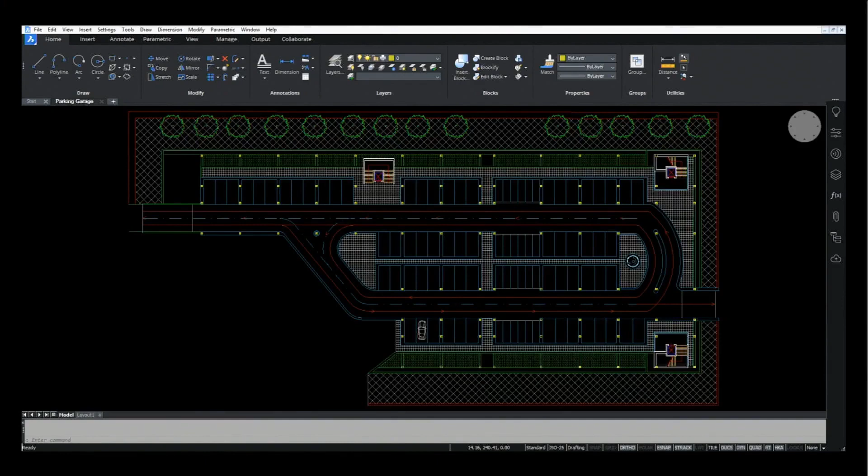It's dark, isn't it? Yep, dark UI - far and away the number one request. I am a fan, I was one of the guys asking for that. Yeah, what we heard is, wow, that's really white, or can you turn down the brightness? Your request is our command.

So you'll be seeing this demonstrated. As Heidi and Hans jump in, you'll actually be seeing it in action.

Other things we heard was that from an interface and workspace point of view, people wanted a familiar, easy to implement, easy to learn, and easy to acclimate to user environment. We're aware that a lot of people coming to BricsCAD are coming from other programs, so we want to make that transition simple. Heidi was a huge advocate for getting the new workspace environment set up with different ribbon arrangements, which she'll show you as she toggles through her demo. So we really listened, and implemented a new quick access toolbar, a new startup launcher, and a much more discoverable and easy to control quad cursor, so new users can be just as at home with it immediately as experienced users who already understand the quad.

But enough of me, let's get over to the action. Over here is Heidi Hewitt and Hans de Backer, and they're going to be your cruise directors today for looking at our demo features. And I'm going to go ahead and hand it over to Heidi.

Great, thanks Robert. We're really excited to share our new user interface with you. I'm going to go ahead and start by actually launching BricsCAD V20. You can see we've got our different product licenses there, so depending on what license level you have, you'll see what access is available. And you can easily update or upgrade if you want to access a license that you don't currently have.

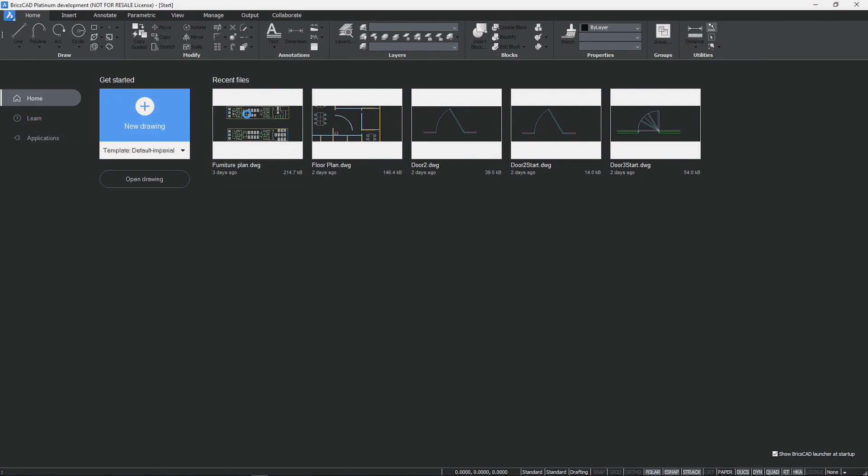Starting off, I'll go into the drafting workspace. What you can see here is we've got a new Start tab with your most recently used files. You can create new drawings, open existing drawings. We also have a Learn and Applications tab for learning content and third-party developer applications. I'll open up a drawing and take a look through the interface.

As Robert mentioned, we've got the quick access toolbar up here, and this has the most frequently used tools that you will use regardless of which workspace you're working in. So a lot of commonly used tools up there.

Below that, you'll see the ribbon. This is the default drafting ribbon, but we really have a default workspace for any of the environments you work in. We want to make it easy. One thing we learned from customers is that most of you are working in 2D right now, but you want to go to 3D and to BIM. So we made it as easy as possible to move from 2D to 3D to BIM or mechanical. What you see here is the drafting workspace with all those 2D tools that you have in a core BricsCAD classic license.

But very easily, if you switch over to a modeling workspace, you'll see a very similar UI with access to those 3D modeling tools, in addition to the drafting tools you still need to create 3D profiles and that kind of content. You'll notice we have some new tabs on this workspace, the BIM and mechanical tabs. If you don't have a BIM, mechanical, or ultimate license, you won't be able to use these tools, but you can see what's available, and if you choose to upgrade, you can migrate pretty easily from the existing tools in a modeling workspace up to BIM or mechanical by seeing the tools available in addition to what you've been working with in 3D.

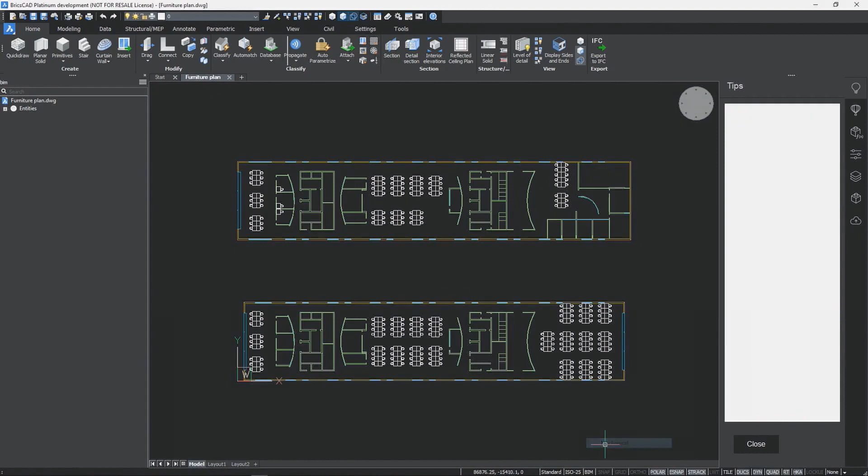We know that a lot of people also like to use toolbars, and everything I'm showing you is completely customizable. For those that like toolbars, we still have the drafting and modeling toolbar workspaces available. So everything is available by default, how most of our users want to work, but again, all customizable.

Before I go to the quad, I want to point out the panels. These are great improvements across workspaces in V20 - stackable panels that you can display. Previously we had the ability to stack panels and display them by tabs, but if you stack a lot of panels like your attachments, layers, and properties panels, you can have quite a few tabs and can't necessarily read them all. So we gave you the ability to stack them and display them as icons. By doing that, you can roll them up out of the way, easily access all of them, and really maximize your screen space.

It goes much further than that. For those who really want to maximize screen space, you can use clean screen, turn off all your tools, and we have the wonderful quad available right at your cursor. This is really a heads-up design access to your tools. They're context sensitive, so depending on the type of entity you pass over or where you are in your design or command, it gives you tools specifically for that context. Some users like the quad but want to turn it off easily when they don't need it, so we've added this X, a huge request we've had from users. You can close that out and always turn it back on from the status bar.

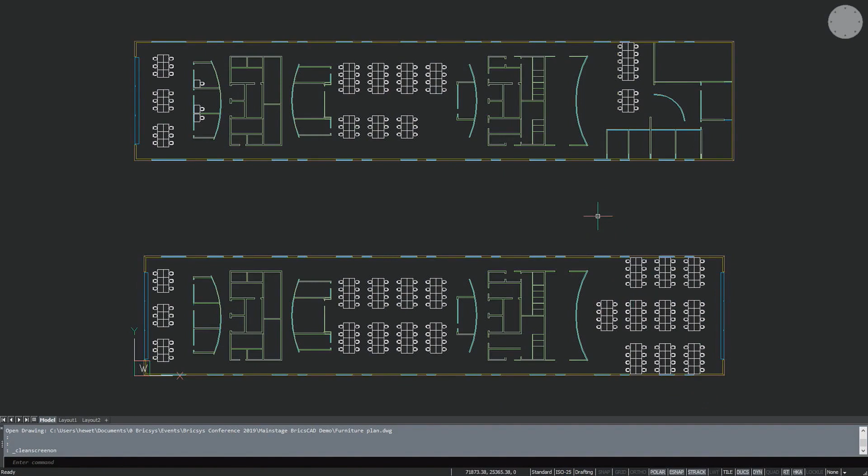So a lot of big and little enhancements that we've made, again, in response to the user feedback we got. All right, I'll hand it back over to Robert.

What do you guys think? Looks good?

Another thing we heard quite a lot, and Heidi and I were kind of surprised, is that civil engineering is a lot more important to most of our customers than we might have thought. What we heard was that whether we're moving dirt around on the surface of a construction site, moving mud around underwater in a canal, or trenching something out in the North Sea, moving dirt, computing basic volumes, and having basic surface alignment capabilities and grading is something that was important to many customers.

So some basic civil engineering features have been grafted into V20. Now, is this a civil design suite? Will this allow you to design subdivisions or do analysis? No, but it does up the bar on the basic features that you will have available to you in a BricsCAD license without any kind of verticals, without any expensive kind of add-ons.

Now, if you want to go the distance, you need to come to the presentation that the guys from Civil Site Design are giving, because they'll show you a lot more about their solution. But at this point, I'll shut up and let Heidi show you what we've got up our sleeves for civil features. Great.

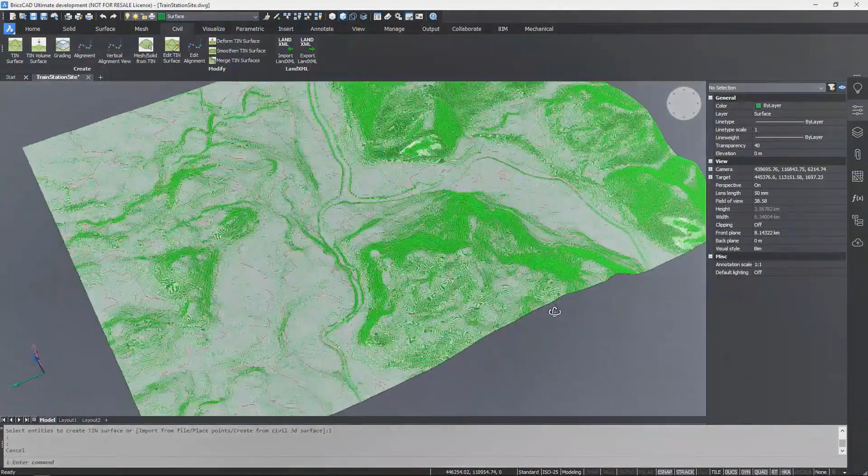So what you can do with the civil tools is you can actually create TIN surfaces. You can create those from a data file where you have all the points stored. It automatically creates the TIN surface, and you can use that for your model. There are various properties when you select that TIN surface that you can use, for example, to turn on contour lines. And then there are other tools for editing the TIN surface.

In this example, what we want to do is just crop the surface so that we add a boundary, so we see specifically the area we're most interested in working on for our design. Now here we're going to focus on creating a little pond in this area. So using the smoothen tool, we can very subtly smoothen out the area of our terrain to create that pond.

And then we can use the deform tool, and as we specify the profile that we want and an offset for it, you can see as I pass the cursor over that it actually gives a preview of where it's going to go, so you can place it in the best spot, and then simply drag up or down to deform that surface.

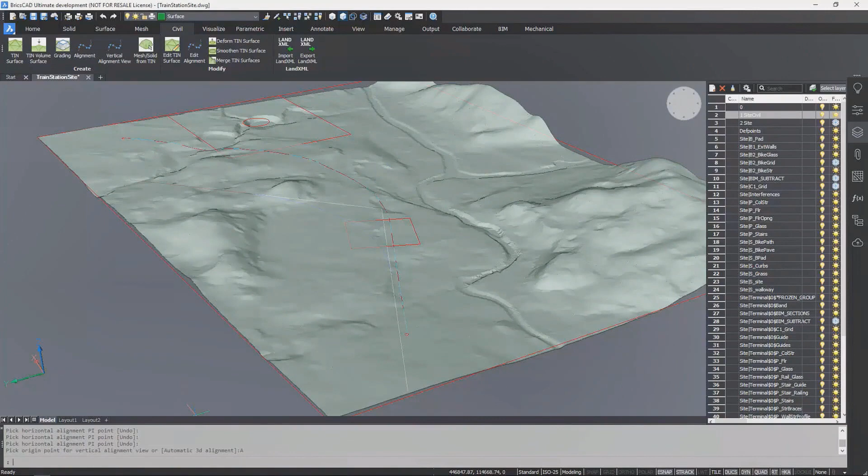There are other tools, such as the alignment tool, and in this example what we're going to do is create a rail corridor for the train station that our architectural team is designing. To do that, we can simply pick some key points for our alignment that we're creating, and by snapping to those points on our design, picking the start point, passing through our train station area and the end point, it automatically creates alignments, horizontal, vertical, and we can have it create 3D alignments automatically.

Now these alignments are all linked together. So as you edit one alignment, like the 3D alignment, the others automatically update. And you can control various properties so that you can see and adjust the design alignment for how close it matches the terrain alignment, the actual surface alignment.

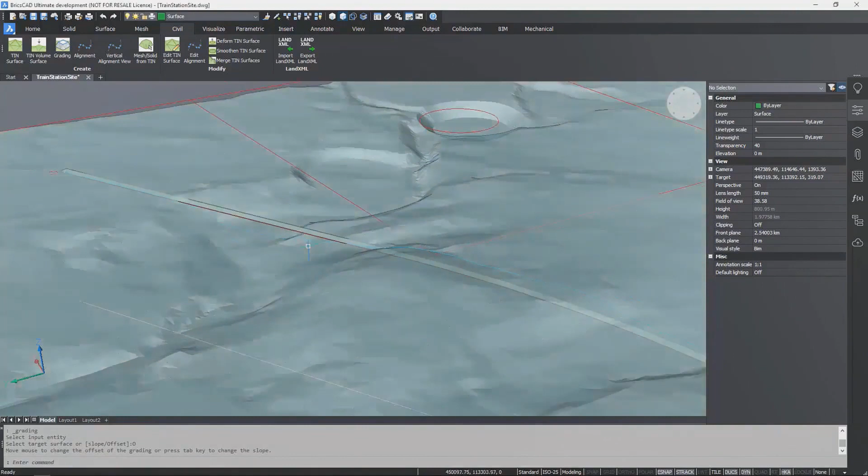Now, in this case, if we're designing a rail corridor, we probably don't want to follow the terrain too closely. We want our train ride to be smooth. So what we can do is modify or create gradings so that our surfaces will actually be appropriate for our design. Here we're creating a grading that we offset the alignment to each side, and even as we create the gradings, we can still continue to edit our design. We can change the shape of the alignment, and the gradings follow because they're all associated.

We'll continue with the design, creating additional gradings. We could create a grading that goes straight down from the alignment to the terrain, but instead we're going to create a grading that goes from our flat surface for the rail corridor and give it a slope down to the terrain, and we'll do that on both sides. Once we have the gradings created, we can merge those gradings together.

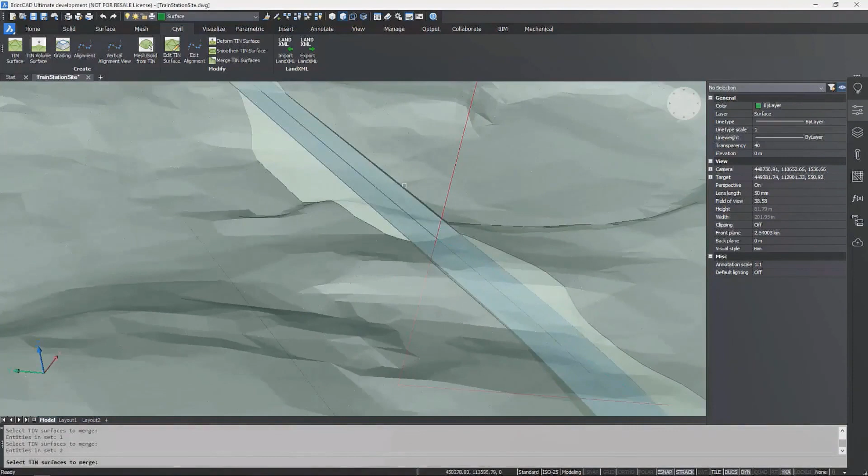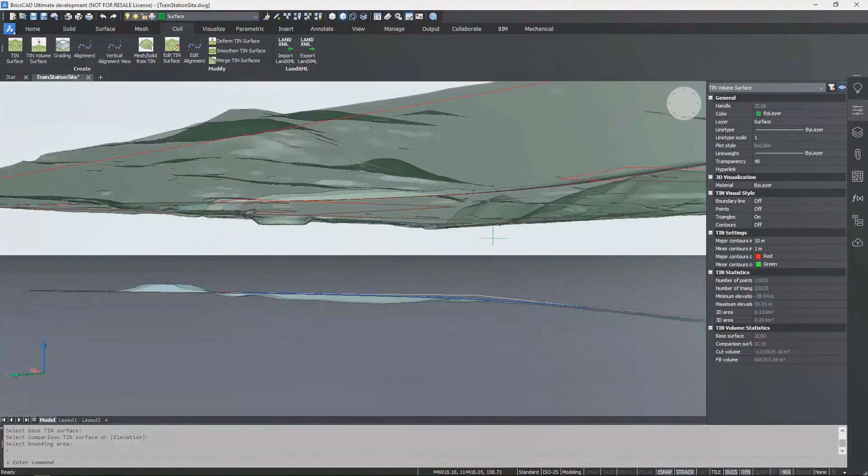So we have 4 different gradings all associated with the alignment. We merge them together, and then we can create a TIN volume surface between our design, those gradings, and the terrain. With that TIN volume surface, we can select it and look at its properties, including cut and fill volumes. So a lot of power here, and this was just one example with the rail corridor, but you can imagine using this as the platform for our building, our train station building, or many other projects—dams, and just about anything else in a civil type environment. These are tools included with BricsCAD V20 with a Platinum license.

Love it when the software works, right?

Another thing we heard when we talked to customers is that Heidi would always show Blockify and Parameterize, which are 2 of our AI machine learning generation tools, and these were always very popular demos. The feedback we usually got was, wow, that's cool, nobody else is doing that—that was the number one thing that was nice to hear. Then right after that, what we heard was, what else? So what other cool things can you do? That sounded like a challenge to us.

Challenge accepted, right? So Heidi is going to show you some Blockify improvements and a new feature called Copy Guided. We're also going to take a look at some futures—things we're working on that aren't all the way baked yet, but will be pretty soon, so we want you to take a look at that. Heidi has a couple of demos she's going to show you, and I'll go ahead and get out of the way and let Heidi show you around.

Great, thanks Robert. I do want to emphasize that as we were meeting with customers, many of them still work in 2D. We love the 3D functionality, it's really cool, but we don't want to forget about 2D, and we want to make our users as comfortable and productive as possible. So from our user feedback, this is some of the things we're able to offer with V20.

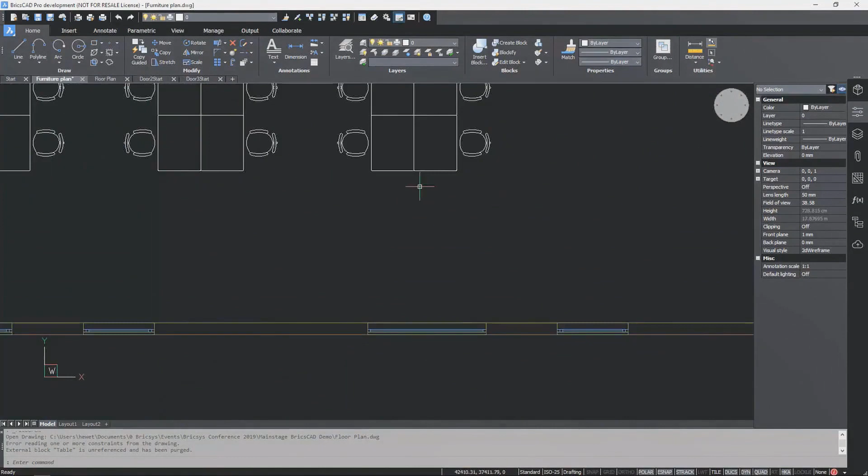In this case I have a floor plan with some geometry representing desks and chairs. If we look closely, these are individual entities, not blocks right now. Looking at the properties, the desk and chair are composed of 9 or 18 different entities. If I select similar for all of those, it's over 4,000 individual entities. So the drawing's a mess, and that's not good drawing practice.

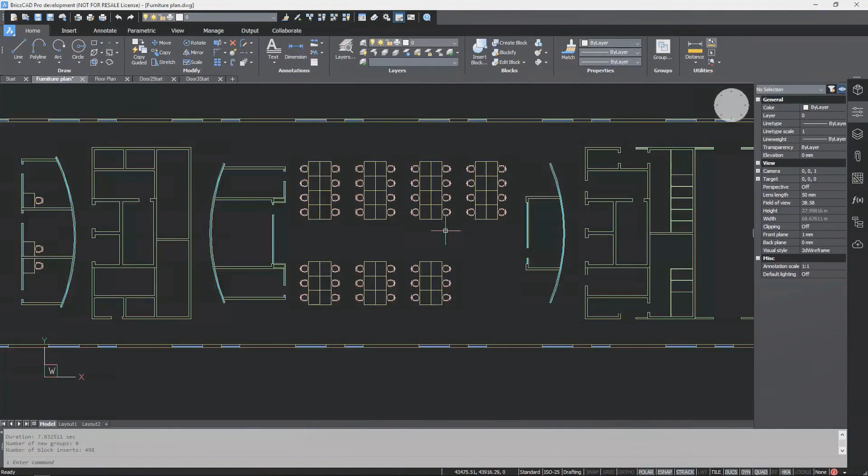What I'm going to do is just use Blockify and take all the defaults—very simple, I don't have to think too hard. Taking the defaults with V20, BricsCAD looks through the drawing database, the block database, and if it finds a block definition that matches that geometry, it automatically replaces all that geometry with those existing block definitions and instances. Really powerful functionality there. But it goes even further—now we've got these two individual blocks, the desk and the chair, created automatically.

What we can do is use the Blockify tool again—there's a setting that lets us detect patterns for arrays. If we enable that setting and select just 2 of the desks and 2 of the chairs, then take all the defaults, BricsCAD automatically goes through and looks for patterns that match those 2, and generates arrays from there. Very quickly it's able to find those patterns. If I select that, it doesn't look any different, but now when I select it I can see it's actually an array with the properties of an array, as if I had created it manually, but it did it much quicker.

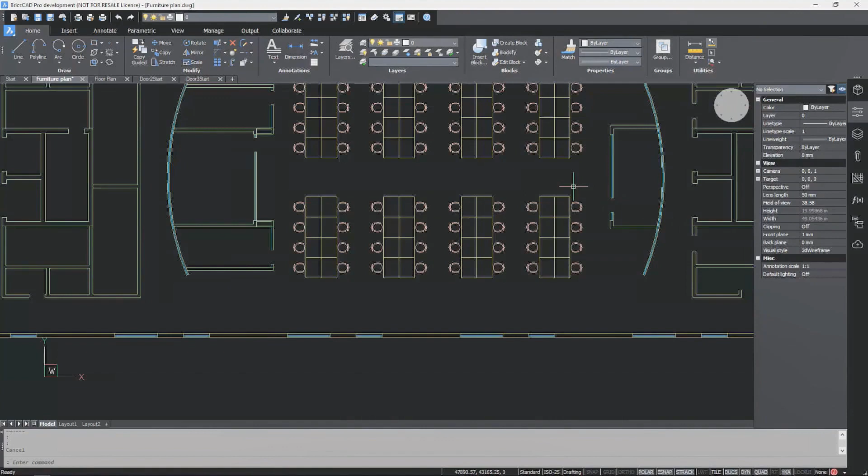So I can change the values, maybe increase the number of rows and columns, saving me a ton of time. If I had to clean this up all myself, it would be quite time consuming. So those are some enhancements to Blockify, which was my favorite V19 2D tool.

Now, in V20, one of my favorites is going to be Copy Guided. By the name, you can tell it's probably something to do with copying entities. What I'm going to do is select this chair, and I want to copy it to other locations. Anything that falls within my selection window is copied, but anything the selection window crosses is used as guidelines. So you can see, by simply moving that chair around, it's automatically snapping to similar entities, and it even snaps to the arc entities.

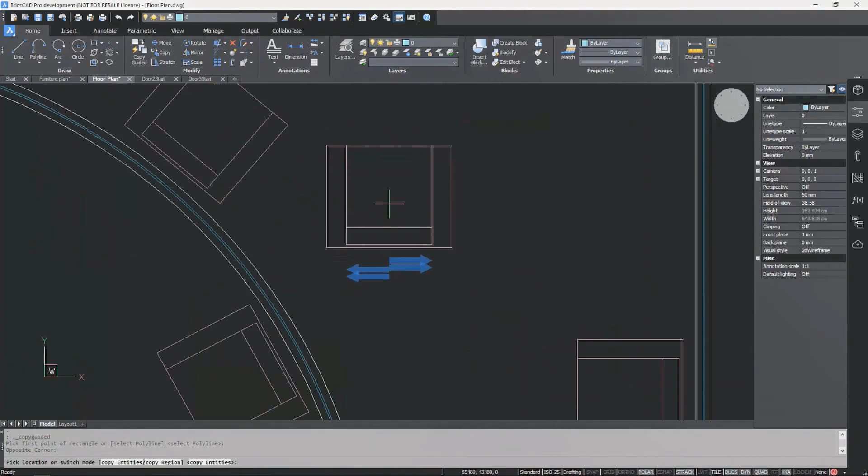In this case, when I created that selection, I crossed over the wall, which included 4 lines. Let me point out, these are just lines, not BIM entities, not walls. This could be a mechanical drawing as well. But it had 4 vectors, 4 lines that it passed over, so when I try to pass it over other entities, it won't snap unless they match those same lines.

But I have more flexibility if I simply select differently. In this case, I'm doing Copy Guided and only crossing over 1 line. Now I've got more flexibility, and any line that I pass up against, it's able to automatically snap to. So there's all kinds of things you can do with Copy Guided. I have to show you more examples because I was having a lot of fun with this.

Over here, we've got a door, and actually this just happens to be geometry, it's not even a block. It could be, but it's not. Using Copy Guided, I'll do my selection window around that door area, and again it detects the guidelines. As I pick to place the door, notice that it's not only copying the door, it's actually trimming the lines away automatically. Again, this is just plain old geometry, there's no intelligence, it's just geometry, okay? Which is great, that's a lot of fun.

But then, to make it even better, what if you erase those doors and now you want to repair those lines? You can use Copy Guided. There's a region tool, or region option. So if you just select what you want to replace it with, which is just, in this case, a bunch of lines, and then specify the region option, now as I pass over that same kind of geometry again, it snaps to those guidelines, and it replaces, it erases the door, and it cleans up those lines. Okay, that's pretty cool, I had a lot of fun with this.

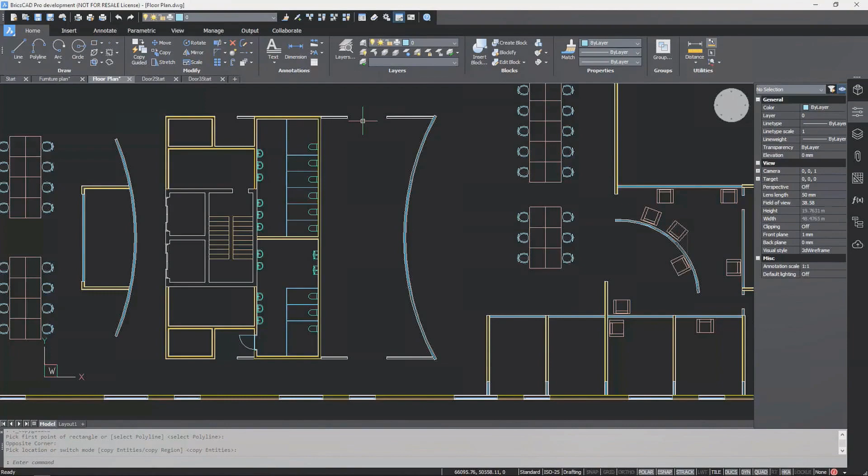So the next thing I want to show you, everything I showed you so far is in V20, you'll have access to that very soon. The next thing I want to show you is the parametric functionality. This is beta functionality, something we're looking to in the future, not available right away with V20, but I do want to give you a look at that.

Okay, so here we've got a door symbol, the geometry to make up a door symbol, and what we want to do is just turn this into a block. Right now it's just lines, arcs, polylines. Using the parametric block tool, which might look a little familiar to you, you can enter the name of the block and select the entities you want to belong to the block. But you'll notice on the right side there are additional tools specifically for parametrics. What I'm going to do is select guidelines here, similar to what we saw with Copy Guided, and then I'm going to use the auto constrain option.

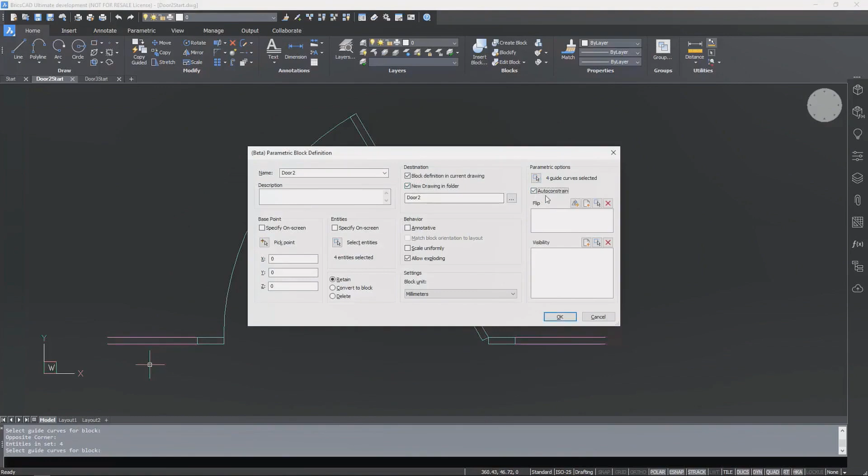Using auto constrain, it knows that it's got parametrics with it, so it adds it automatically to the parametric block table. In there I can either open or insert blocks from that panel. Here we can see all the parameters that it automatically added to the block definition.

Then I can animate those to see how they behave. If you look at the ends of the doors and where the door meets the guidelines, as I animate, you can see that there are actually some things it's missing, right? Some other parameters are applied, and it missed the ones I want.

You have complete control, and with the animation it's very easy to see what you might need to add. For example, I saw there was no perpendicularity between the ends and the sides of the door, so I add a perpendicular constraint, and then just add a fixed constraint to make sure we know a stationary point within the block. Then there are other things I can do.

I can always use the auto constrain tool and add automatic constraints again. If those constraints would over-constrain the drawing, it will give me a message that some of them couldn't be applied because it would over-constrain the drawing. You can always go through and look visually at what constraints are applied, and add and remove them manually, or if you add more geometry, you can add constraints.

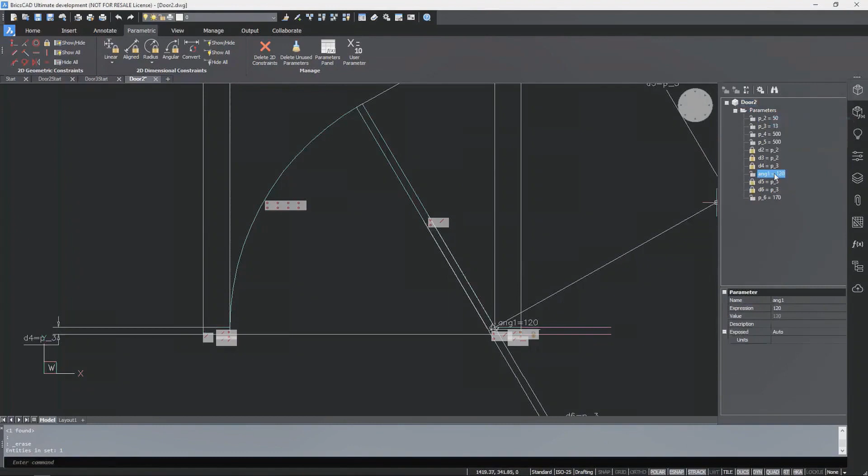What's really powerful here is the ability to see these visually within the drawing as well as in the parameters list, and to be able to animate those. You don't have to insert the block and test it out in your drawing. You can animate it within your parameters panel and see what needs to be done.

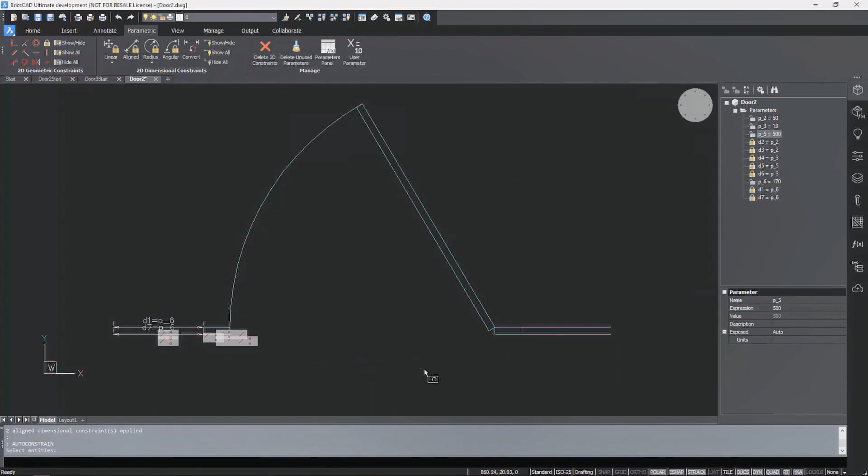So here we see that we're getting closer. We've got the door width working, and some of those parameters with auto constrain weren't applied until we removed the ones we didn't want. Now we reuse auto constrain, and it knows enough not to apply constraints again if they're already there.

Animating again, and now that block's looking pretty good, and I never had to go out and test this block. I just animate it. Now what we can do, I'll just add one more constraint here, an angular constraint, where I want to create that for the door swing.

Now it comes up with default names like Ang1 or P2 or whatever, but I can give those meaningful names. So I'll just call that swing for the door swing, and width for the door width.

You can go through and control the visibility of these parameters as well, because as you can see here, I've got a lot of parameters, and those might be a little scary. You don't want your users, especially if you're a CAD manager, to modify all of those. So there are properties here in the parameters panel where you can change which ones are exposed.

For example, some of these parameters control the thickness of the door or other properties that I don't necessarily want anybody to change, so I can turn those off so that they're not exposed in the actual block definition.

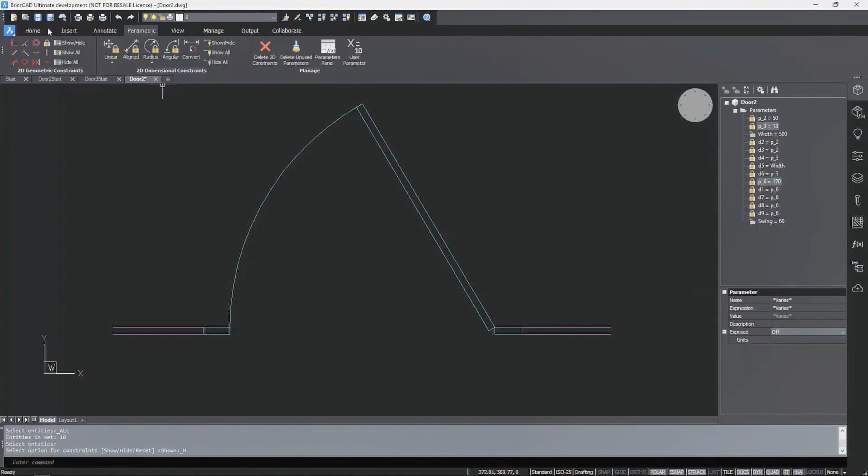Once you've got your block set up just the way you want, which is easy again to see by animating it, you can go ahead and open up your drawing that you want to insert it in, and very easily from that parameters panel, you can drag that block over and insert it into your drawing.

So looking over here, we see the block definition. Simply drag and drop it into the drawing. Those guidelines, just like we saw with copy guided, help us easily place the block.

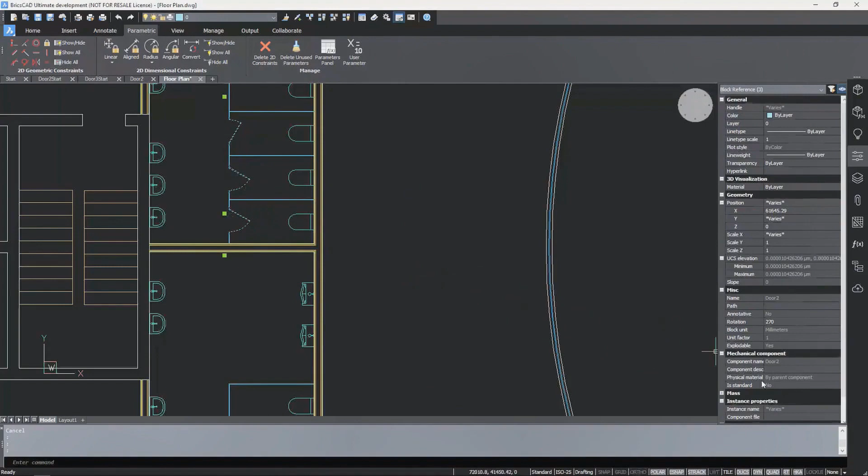Then we can select and modify properties of individual blocks, or because we're doing this within the properties panel, we can also select multiple blocks at the same time. So here we can change the door swing—that was with one block selected. Selecting multiple blocks and going to the parameters, we can change all of those door swings at the same time, and the same with the width as well.

That's one example of creating a block definition, using auto constrain. I'm going to stay in this door theme, but even though I'm talking about architectural drawings here, this can be done with any type of 2D block.

Right here, we've got a different door, and instead of using auto constrain, what we're going to do is use flip and visibility constraints. So again, using the parametric block dialog box, we create the name of the block, and then I'm going to select just the entities that I want to be displayed in every visibility state. Okay, and then guidelines, just like we had with copy guided, we'll specify the guidelines.

And now I can very easily add flip constraints, and I could remove, maybe I want only horizontal or vertical, and I could rename them to something more meaningful.

And then I can very easily add visibility states, so I can give those meaningful names. For example, I want a swing visibility, so I can control the door swing, the visibility of those different swings. And I can select which entities belong to each of those swings. I've got a 90-degree swing, a 60-degree swing, selecting just the entities for that particular visibility state. And then I can go on down and do the 45 and the 30 and a closed one as well.

So this is just a different way. We had a block definition before that used parameters where we could enter the degree value of the swing. But imagine any kind of block where you have visibility that you want to show - you can do that using these visibility states.

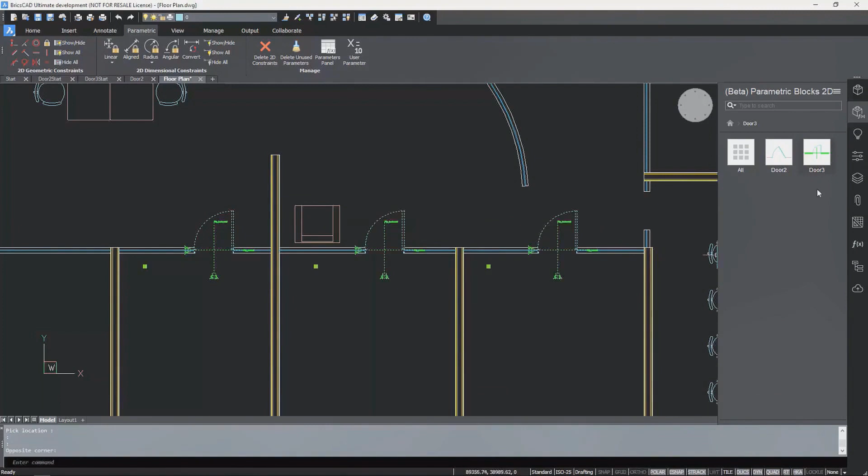Now you see, because we have flip states, we see the graphic indicating that we have flips. And if we look at the properties for that, we can visualize as we pass over the different options in properties, we can see it flip either horizontally or vertically. And then also the same thing with those many swing visibility states that we added.

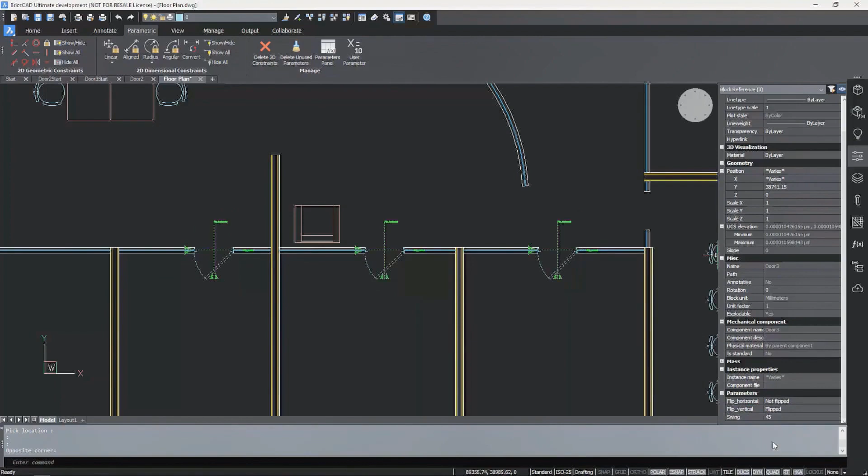So just a whole different way of doing it, but easy, really intuitive to use. All right, that is a quick look - again, that is preview functionality. This will not be in V20 when it ships, but it is something that we are looking at and is coming our way.

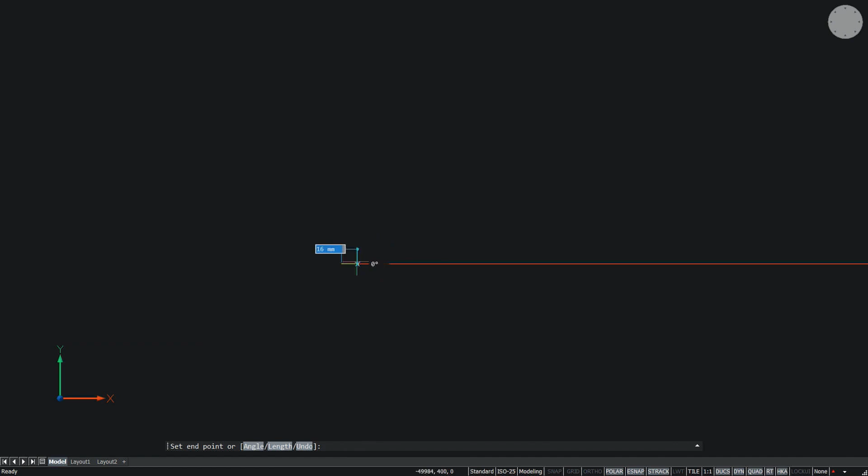You click your first point of your line, and then the length is indicated, and it jumps by values of 10. If I go to bigger distances, I switch to meters. Initially I was at centimeters. The switch is automatic. If I go back and zoom in and it becomes a very small line, I switch to unit millimeters. If that's not enough, I go back and then go to tenths of millimeters. And you see, I always can draw accurately.

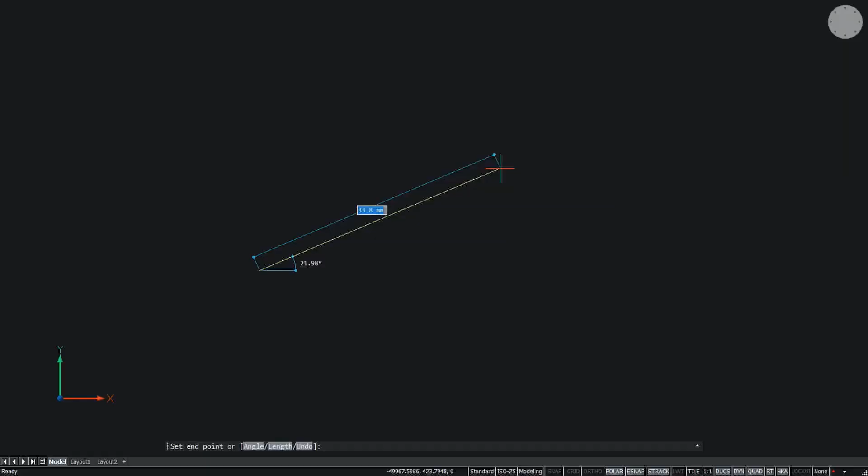And this grid follows me at whichever angle I want to choose. Because another grid, if you start drawing at an angle, that grid becomes your enemy, because you cannot pick the location that you want or need. So in BricsCAD you can draw lines.

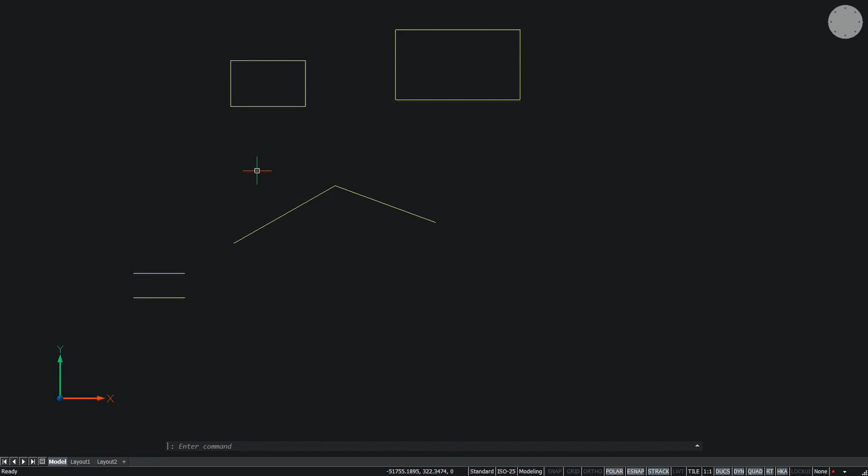That being said, let's draw two lines. And what else can we do? Basic stuff - how about a rectangle? Now, if you draw a rectangle, again you have the same tools. And that's all very fine as long as that rectangle is aligned with your main axis. The moment you want to draw something aligned with this, then either you need to fumble with snapping settings that you change, or with installing a UCS. But often, looking for improvements, it's not rocket science. Often it's just a natural extension. Those are the best improvements that you can find.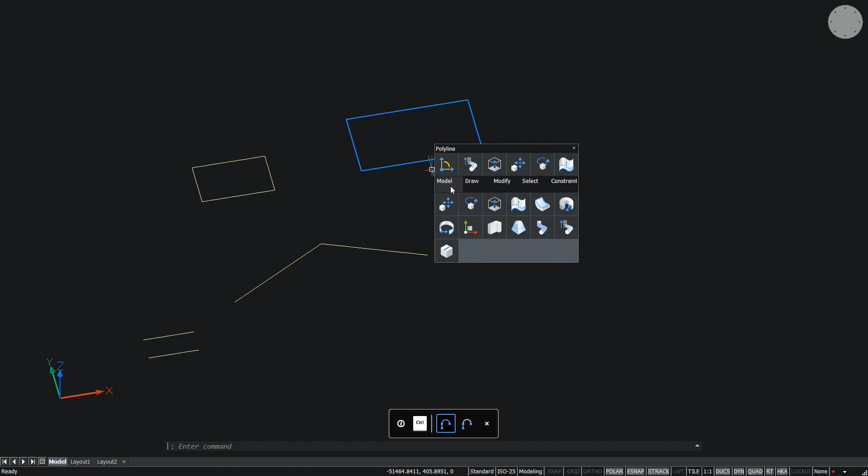Now, what you can do when you draw, for instance, a rectangle - if I hover this face, you see it lights and I can lock it. It's my UCS that's being locked. I can unlock it by tapping it again. But I can draw on top of that face, and I can draw on other faces that I also can lock. You see it become blue, and then not blue when it's not locked again. So here I draw on the side face.

Now, how about if we could use that same technology in 2D? Let's give it a try. So we extended the dynamic UCS and now allow it to be applied for other entities. So we again draw that rectangle, and now if I approach this line, you see the UCS tripod that is being depicted. This is a temporary dynamic UCS. If I hover here, this is my temporary dynamic UCS. So I can just approach the entity and draw the thing I want.

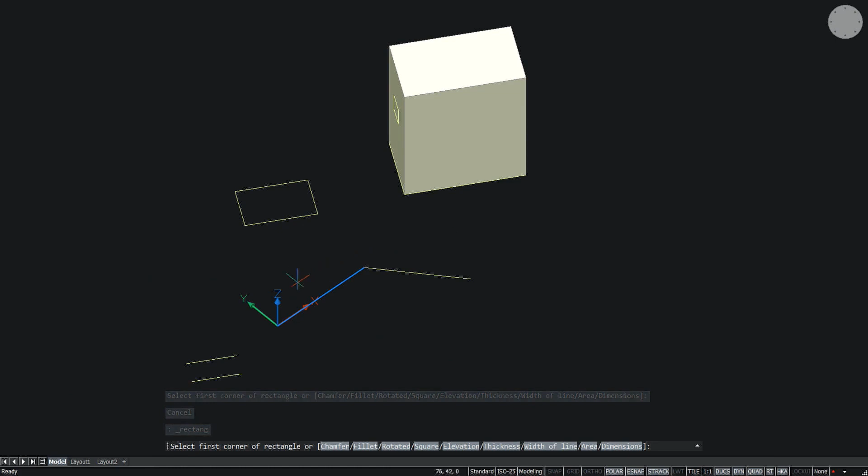I can also lock it. So here I can move away my cursor any place, or once it's locked, I can key in values, like in this temporary coordinate system - say I want a value 50 by 29, whatever - and I start drawing. So dynamic UCS is now available for any kind of entity.

As I said, it's often in the simple things. So how can we save time for you? For instance, if you want to know what is the location of this vertex - well, as you see, I just highlight it, and the moment I highlight it, I get the position of this vertex. There's no need to start a command like ID or whatever. And in fact, the best commands are those that you don't have to pick on some menu or a ribbon - they are always there at your fingertips.

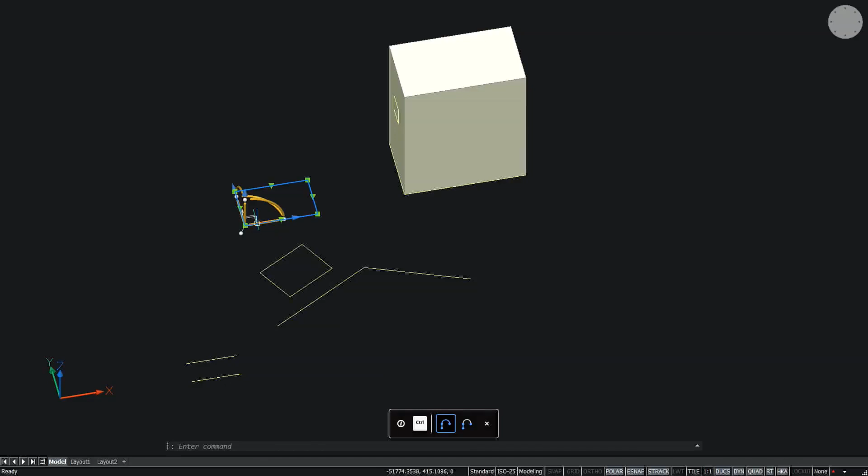What are the 4 most frequently used editing commands in CAD? Well, they are commands to move, or to move freely without restriction, which is newly added. They are the commands to rotate, and there's mirroring.

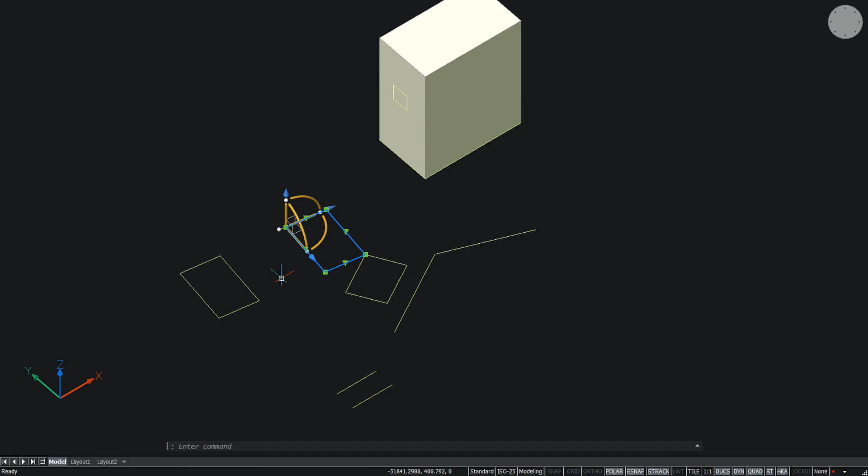Now, did you see that in fact I didn't start any command? I only, instead of selecting short with a short click as I did, selected by clicking just a tiny bit longer. And wherever I want these 4 most used commands and I need them, I have them immediately. I don't go to the ribbon to pick it. The best commands are the commands that you never enter.

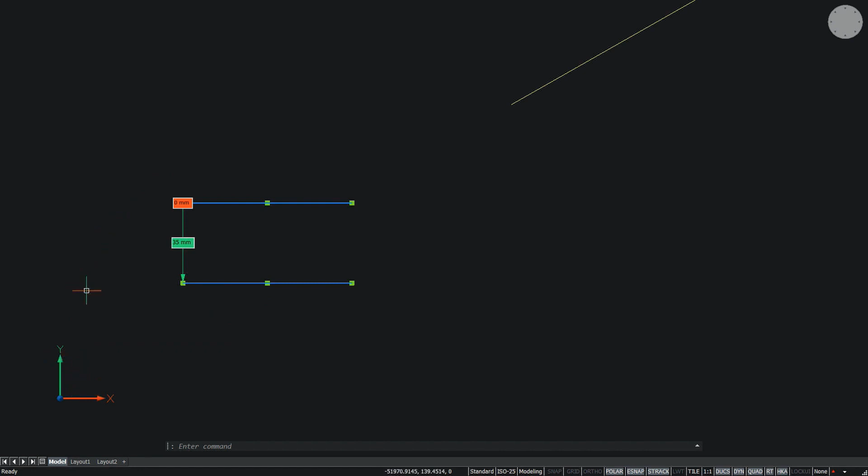And along a similar vein, another example of the best commands that you never enter is like nearest distance. Whenever you select 2 items, we show you the nearest distance. And we have improved it, so now the green value is the one along the y-axis, the red value along the x-axis. What happens if I move entities? You see, these values come along, and now it shows me that my x value is 21. I could move my entity until it's in the location that I want to use, and every time check back.

But you know, this is not simply information that we show - this is, again, a command. This is the move command, but in a very refined way. If I want this distance to be 50, then I just key it in. If I want this distance to be 100, then I just key it in. It's as simple as that. It's always there, available. So we look at the basics, and you can use this wherever in BricsCAD, wherever you're working.

Also in 3D, I select this line, I select this top face, I get these distances. If I want the height to be 200, that's how much time it takes.

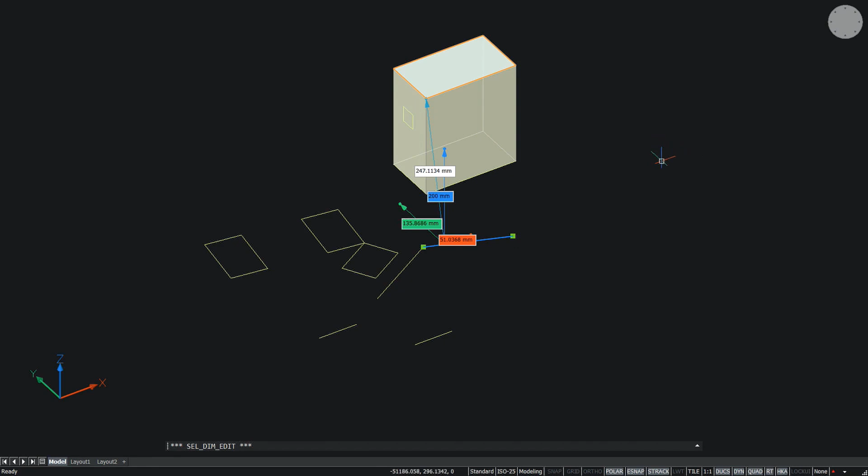Very convenient, this tool. Now, of course, you're not always drawing with just a few tools, so performance is also important for ease of use. And for performance, well, I'll use a bigger drawing.

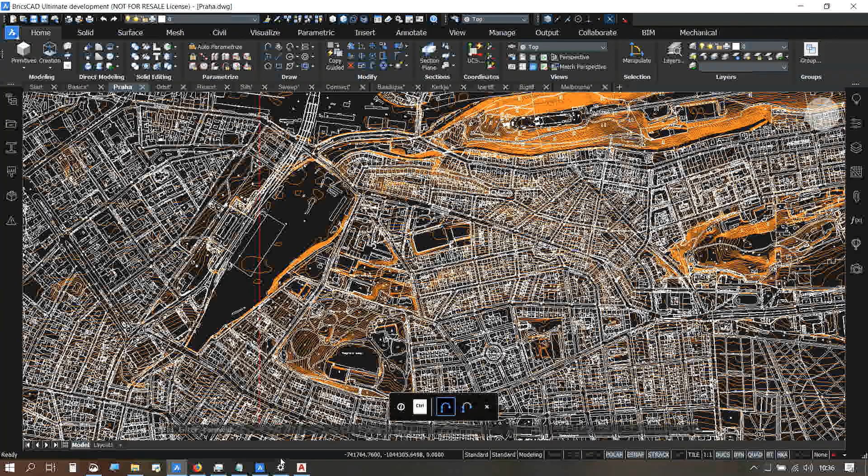Let's look at how it was in V19. This is really a huge drawing, by the way, containing 500,000 entities. So if you redraw that, you need to draw millions and millions of line segments before it's there, and that's also what happens if you want to move such a huge amount of stuff.

You select it, and it indicates here in the corner that it has selected 500,000 entities. Then I pick a point, and this is V19. Now you see the dynamics that are being drawn, and it's very shaky. And now my cursor is stuck.

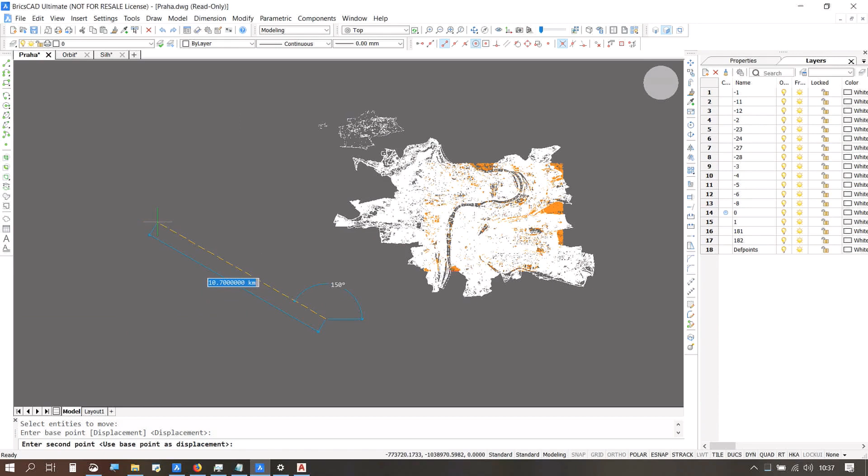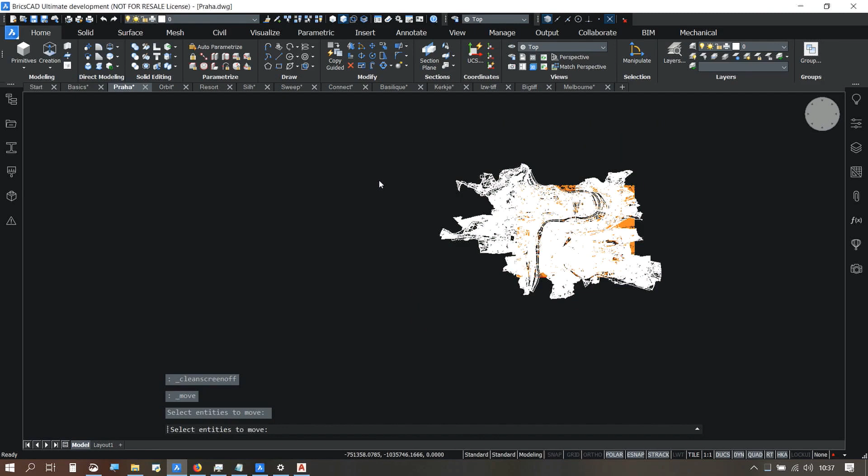It's really inconvenient if you have to draw like that. So let's have a look at how this is done in V20. We worked on that. So we zoom out, start the move command, select the bunch of lines, and all of the city of Prague is selected. Now we start moving it.

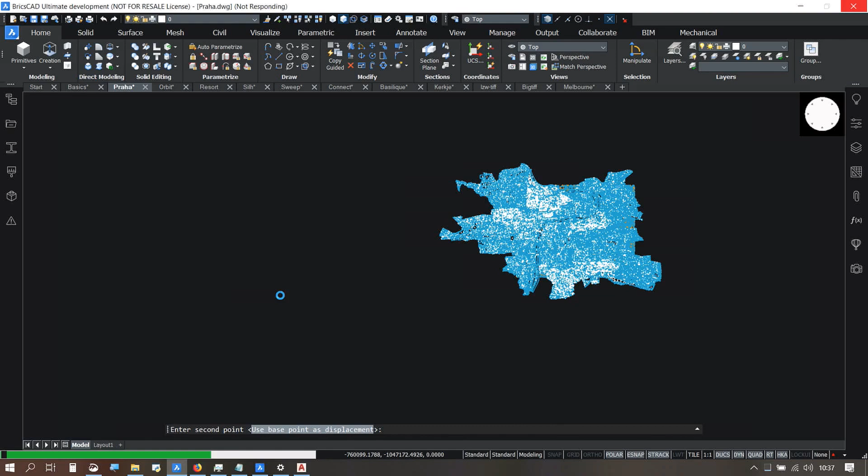Look at how smooth this goes. I can move it anytime, anywhere. Shall I move Prague a bit more to the left, dear? So now with V20, no more worries. Next time someone asks you to move Prague a bit more to the left, you say, why, of course. It's there, no problem.

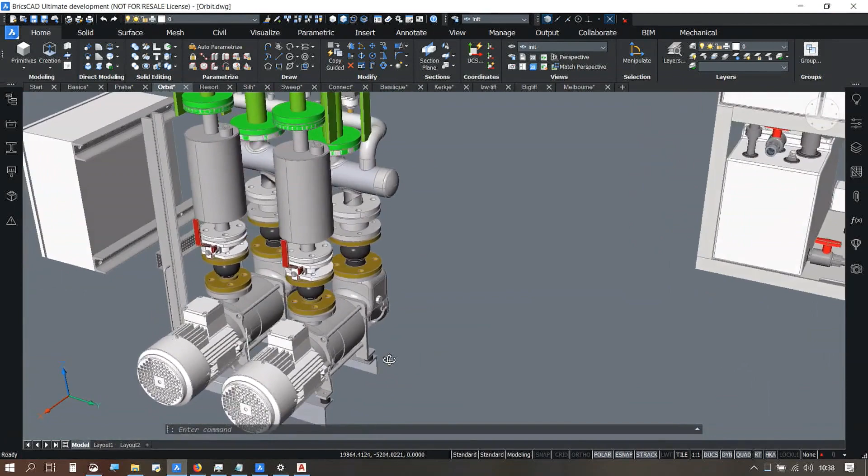Other things that may help you is if the orbiting, the tools you use to orbit your view on screen, work conveniently, as you expect them to. That's what it's all about with software. It has to work predictably, as you expect it to respond.

Now, the difficult part here was that if you point in empty space. Let's have a look at how it behaved in V19. If I click in empty space and start to rotate, everything's gone. That's not predictable.

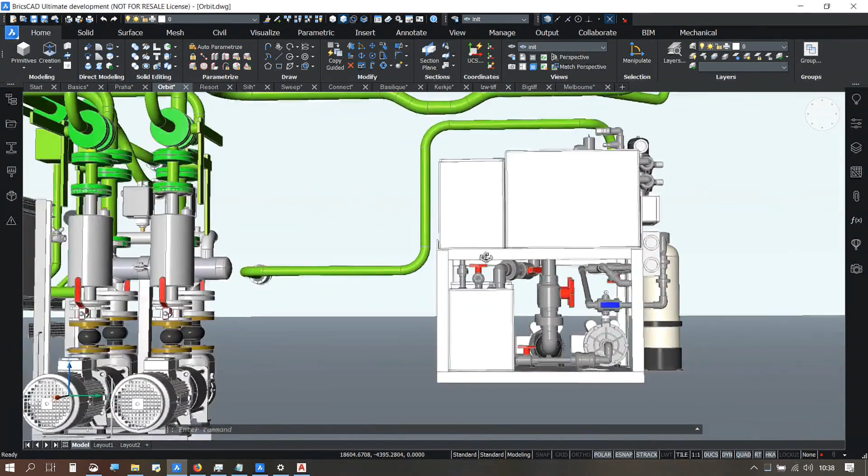So let's go back now to V20. I'm in empty space, and it's as if there's some virtual point there that I can rotate about. It really helps you, and it saves you time. It makes it more pleasurable to use.

Other things that help, we are always looking for how we can improve the user experience. Users have been asking us—I think it's the most frequently requested feature ever—viewport maximize.

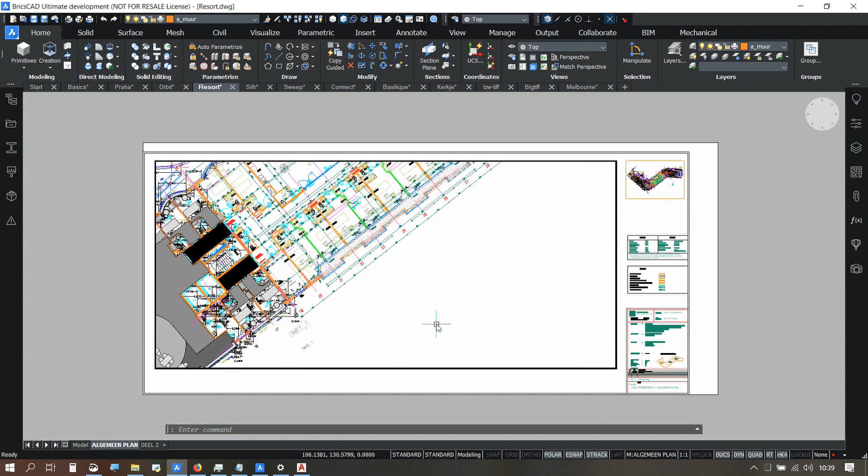What it does is, if you click in a viewport to activate it and you start zooming, then the scale changes, and that's not what you want. You want to keep that scale. Okay, you could lock the scale.

We have added a tool, by the way, to lock the scale, but that has other inconveniences which you want to avoid. So instead, you just double-click on the border, on the boundary, and now you can work on the item you want to work on. And if you've finished, you click again on the boundary here at the side, and you see that the original scale is preserved and restored.

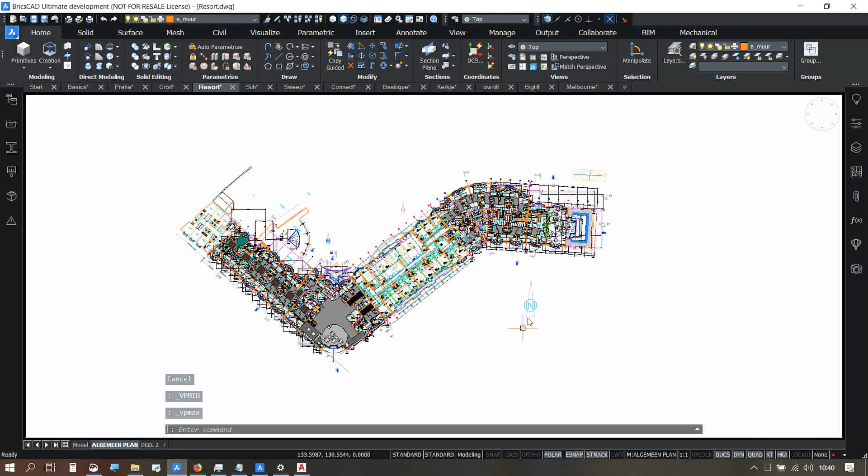Other ways to do the same: you key in, and then from the right-click menu there is minimize viewport. But this is a very handy tool, so we are adding these handy tools.

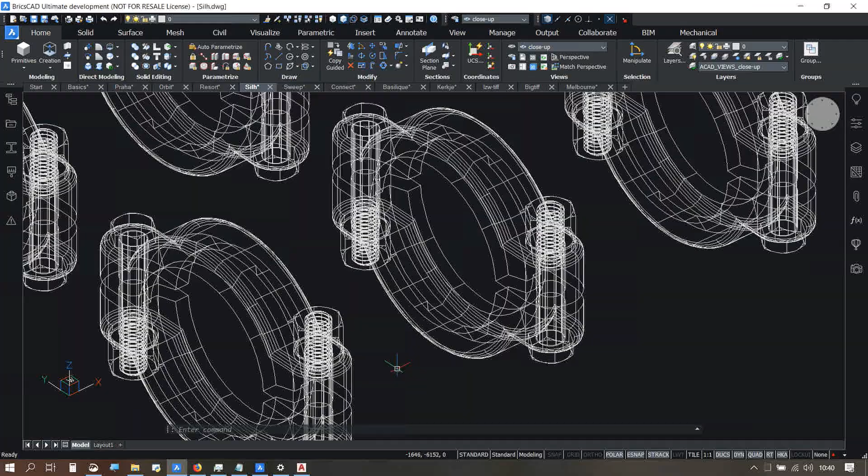And because performance is important, we often work on performance. Here we worked on performance of silhouette lines. Don't get fooled, this is a heavy drawing, because I've created a forest of these things—it's thousands. But it helps to illustrate the point.

Like in V19, if you had this view and wanted to switch to a layout view, you see I get this blue wait cursor. It's lovely, but after a while you've had enough of it. So in V20, look at the speed of switching back and forth—it's like 1 second. And that's while the other version is still calculating.

So let's go back to V19. It's still crunching. Now we're there. So I think there's an improvement.

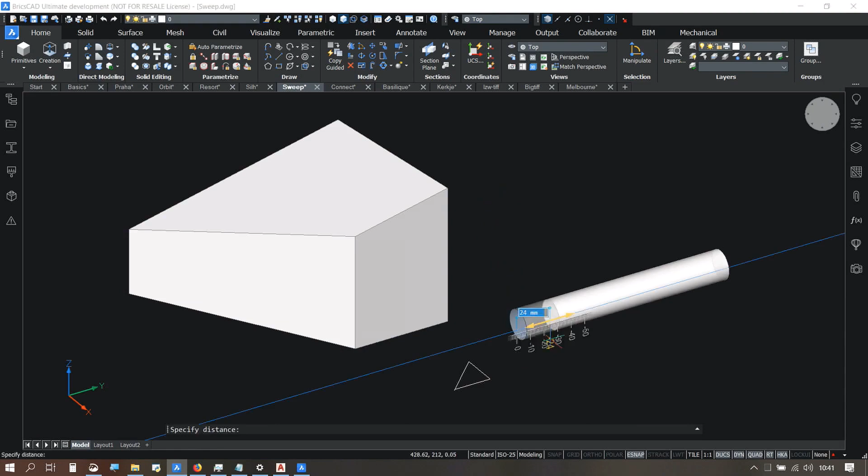For sweep commands, we try to make them more user-friendly by making them more direct modeling, so that you get immediate feedback of what you're doing. Much like if here you are push-pulling this face, you get immediate feedback. That's nice to work, that's what you want. So let me just activate another snap.

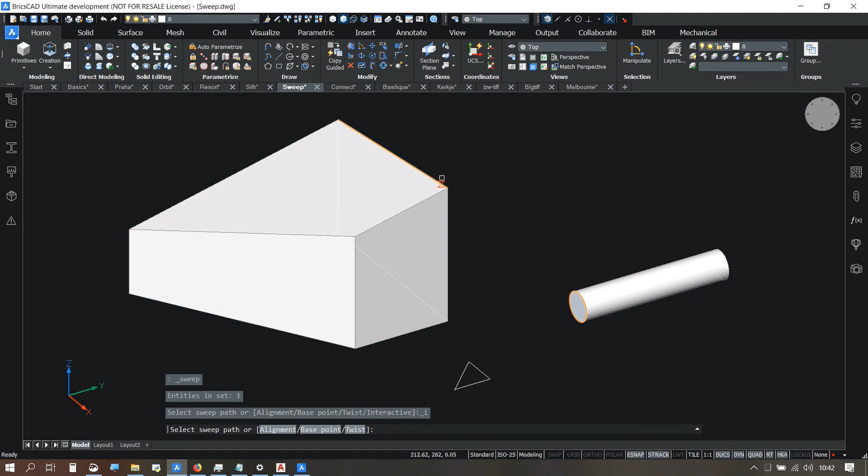With this same face, let's now use this new tool. It's a new variant of sweep - interactive sweep. I want to sweep along this edge. You see, now I can really control that sweep as I go, and as I go further, I control how it continues. I want it to go this way, now that way, let's go up again. And now as the finishing touch, it creates this mitre at the end. Not bad. That's a new sweep direct modeling variant in V20.

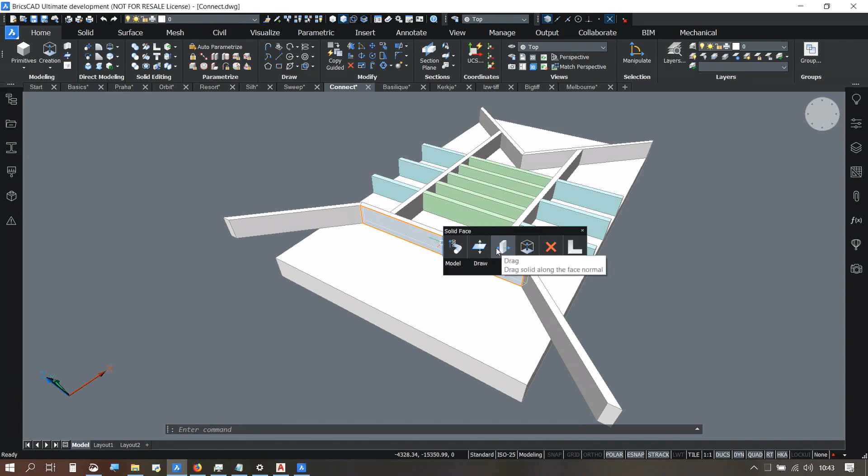Now, this year in V20, there's a present that we received from the BIM team, and everybody who has a Pro license now can use this BIM functionality. The functionality I'm talking about is drag. What it does, it allows you to drag solids in a connected way, or if you press the Control key, in a disconnected way. Control key again, and I have it in a connected way.

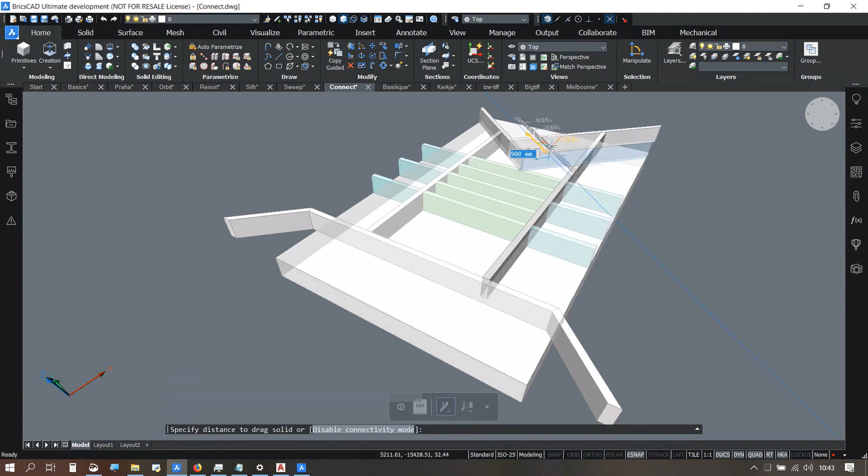Same thing here. Watch the green solids, they have shrunk. The blue solids have become longer. These are just ordinary solids, the only thing is they touch each other - that's enough to get that functionality. Here the same thing with that wall. Watch the connections - you see the connection at the top here goes along, this mitered connection goes along.

Now, as we got this present from the BIM team, our shape team could not stay behind, so they said well, we'll throw in the render materials panel, and also some nice material definitions. So all you have to do is click and drag, or let it drop, and that's all you need to simulate.

If you want to do the same thing for the wall, or if you don't like it, there's this erase tool that resets your material definition. So yeah, there's a nice present that we got from the other teams, all available in the Pro license.

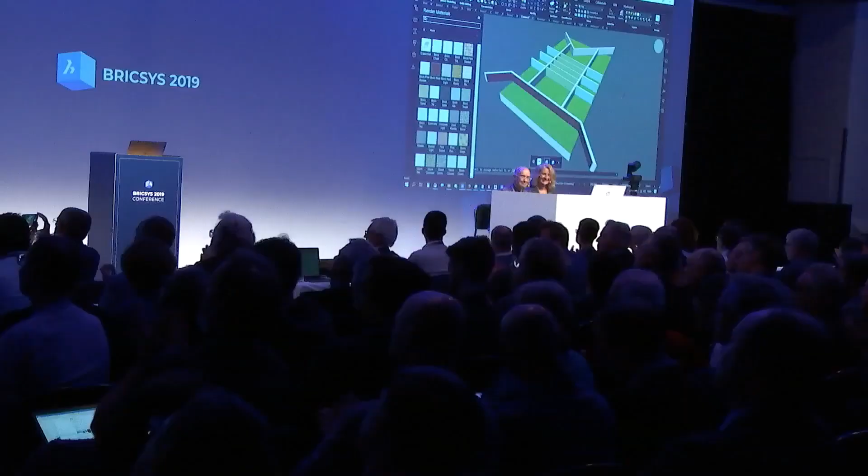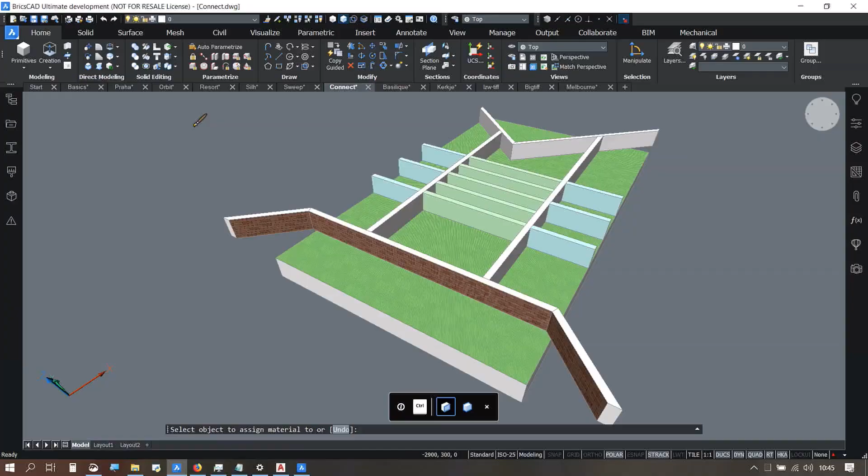The BricsCAD format is now using the same format as we are using for our virtual reality module, and it allows very fast moving through the points. And also it allows nice stuff like dynamic point resizing. Why would that be important? I will show you in a moment.

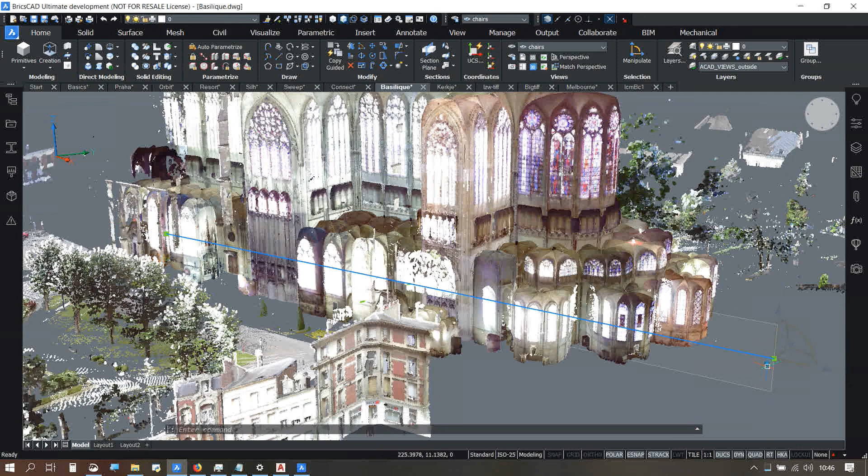Now, while this indexing is going on, let's have a look at some bigger point clouds. This is a 1 billion point cloud, approximately. And just to make it easier to see some of the stuff, I will activate a section plane here. So it's rather fast to clip away, and I can zoom in and move through that huge point set.

I can do the same for other point clouds. So you see all these drawings, they are loaded in one session, so the workload on your processor is really minimal, while in the background there's also the other point cloud processing that is going on. Now, how hard is it also to clip that up? Because in the other drawing I had my section plane already there. Just look, I drag a section plane over here, and that's all it takes.

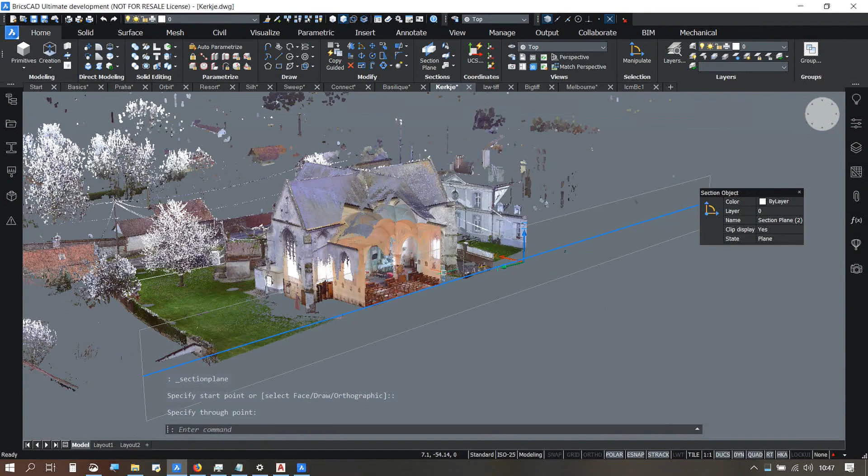It's very fast. And you can use this - this is the dynamic point resizing, by the way, that you see going on. It looks for the optimal point size, because such point size is important.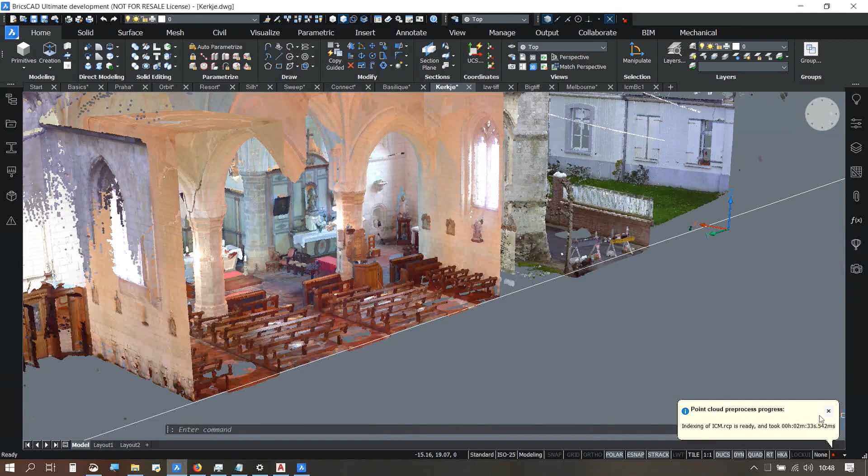There's a message popping up alerting me that the point cloud pre-processing is ready, so we can go have a look there. Is there something that strikes you in the quality of this image compared with this one?

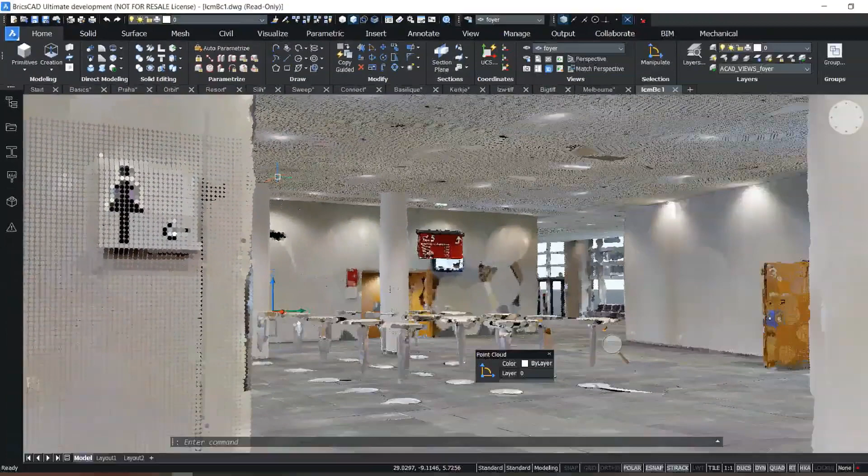It's an example of why it's important. How come? Well, if we zoom in, you see here we use very big pixels where there was no dense measurement. Here we use a smaller size, half size in between, and here we have a lot of points, so we can use small pixels. This blown up view lets you see better why that dynamic point resizing matters.

Now, along with the increased demand for big point cloud sizes, we get increased demand for big images that people want to attach, and also for very old formats that are still alive, like fax format, CCITT G4 I think it's called. We added support for that, and we added support for virtually every TIFF variant that exists out there.

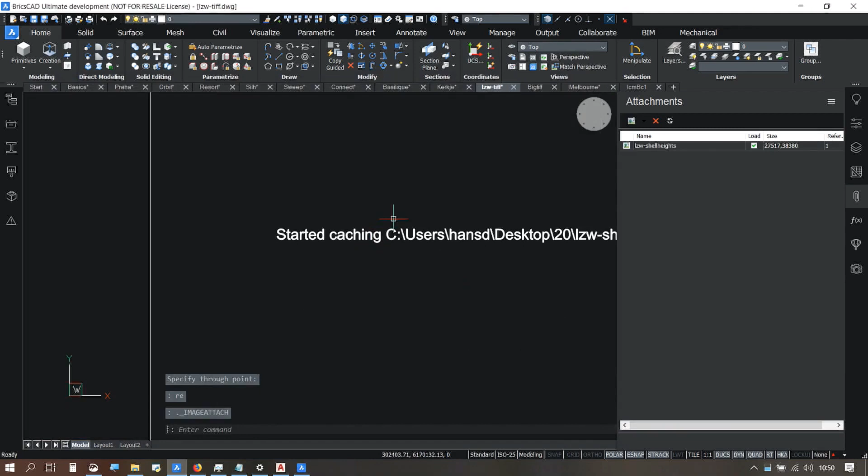Let's just load such a big TIFF. First I'll load a regular TIFF file. Similar to what you've seen with point clouds, we give a message that we start caching, start indexing. We in fact create a multi-resolution format, storing the image at multiple resolutions, which greatly enhances the way you can work with it.

While this conversion is on its way, let's have a look. These are the fax format things that we now support. And as I said, we also support BigTIFF.

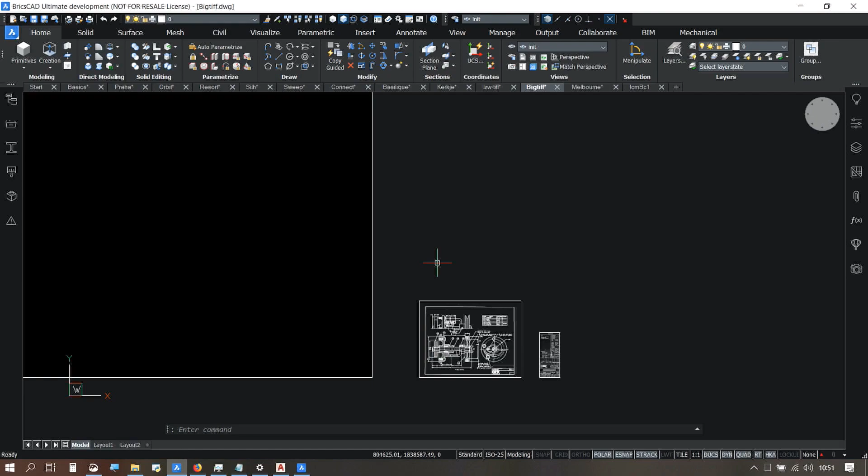What is BigTIFF? Has anybody heard of a petabyte? A petabyte is 1024 terabytes, so it's quite big. Now, a BigTIFF file holds 18,000 petabytes - quite a lot. Here on the left you see a BigTIFF image, the black thing.

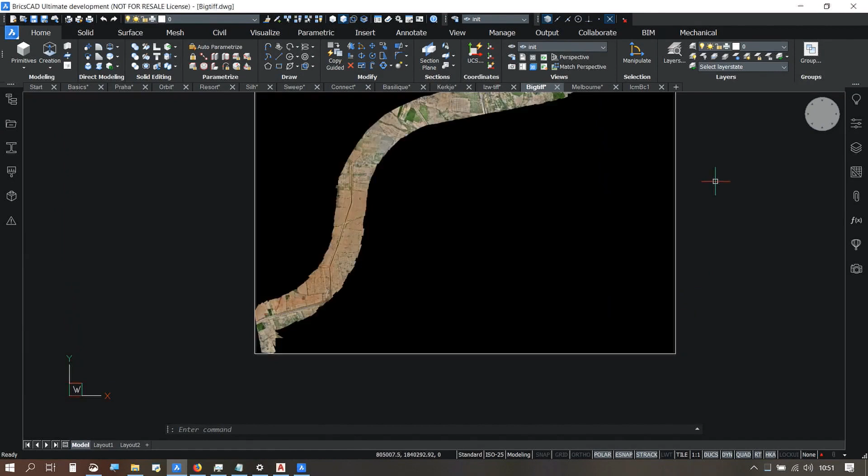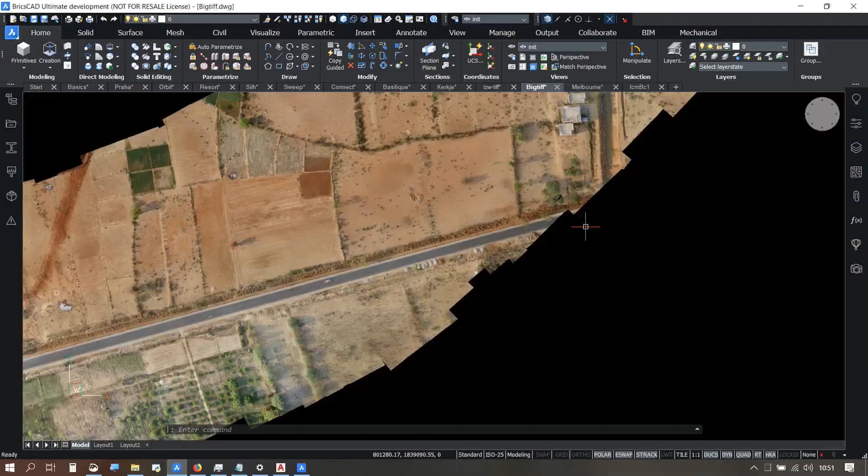I'm just zooming back - ah, there's something coming. I'll draw a line across: it's 5-point-some kilometers, about 3 miles. Now look at the density here, because this is made with drones, and these drones take thousands of images that are stitched together. Look here, you see the tire marks, and you even see the wires on the poles, the electric wires. This is incredibly detailed.

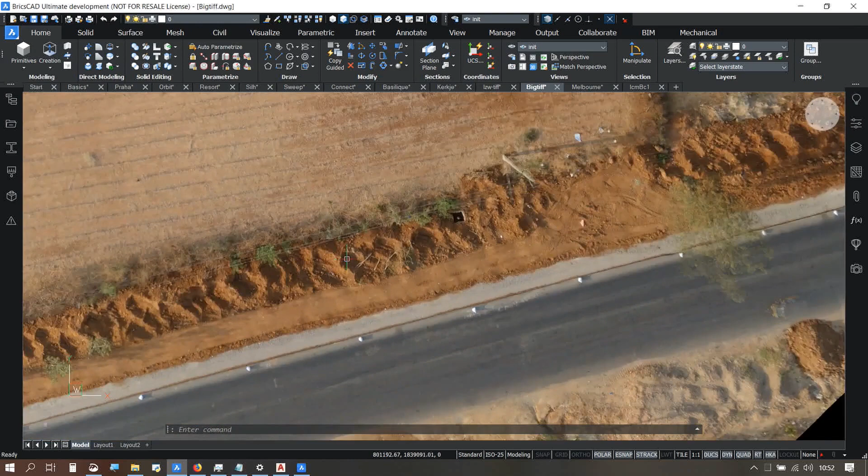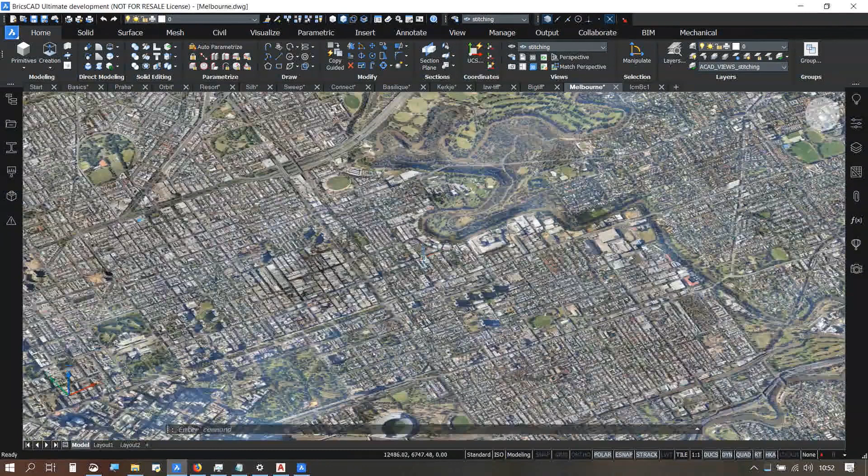What we had to do to show the power of that technology is stitch together hundreds of images - here you can see the stitching. This is a 60 gigapixel image. You see the speed at which that's handled is just as fast as I can scroll my mouse, it goes along. Now, same thing with BigTIFF - we're just preparing for the future.

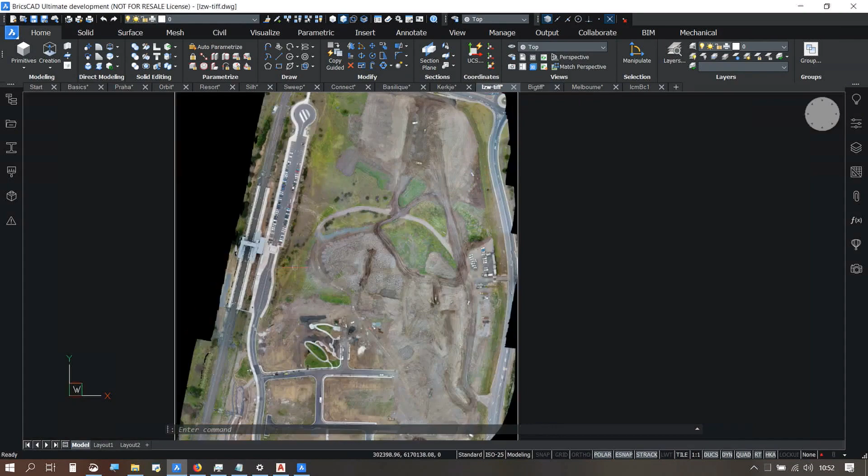Meanwhile, the other one has been pre-processed and it's available. It's also made with a drone, multiple images stitched together, because it's unlikely you'd have two exactly the same cars or trucks there - no, these are two different moments. Thank you for your attention. This is the future, where we're heading.

How cool is that? Hans de Bakker. So, the core of BricsCAD - there's just a couple of things I want to say because he's too modest to say it. That was done on a laptop.

What was running on that laptop? AutoCAD, V19, V20, all at the same time. No real special graphics card. It's all done in DWG, no proprietary formats. So is anybody else doing that in the market? Is anybody else doing the AI features we've shown you? I haven't seen it. So what do you guys think of BricsCAD V20?

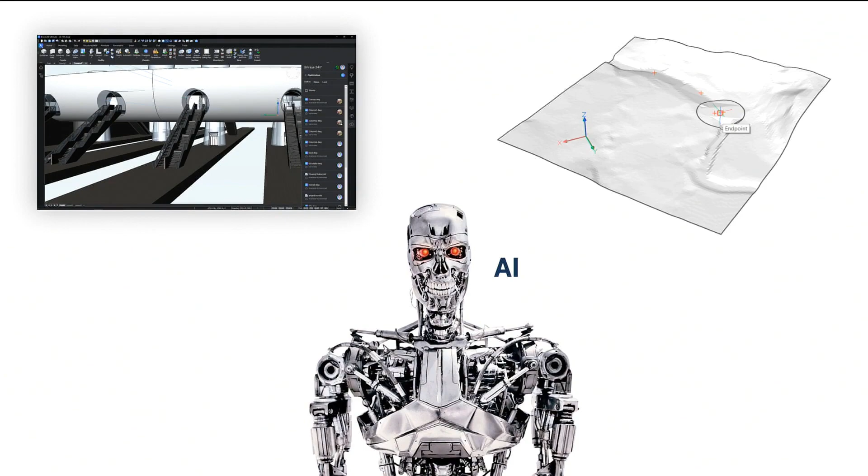The dark UI looks absolutely stunning. The newly added civil features open up a whole new world of possibilities for our customers. And as you can see, the sheer speed at which our artificial intelligence is being improved will have you having real conversations with BricsCAD quicker than you can say Skynet.

Something's missing though, right? Collaboration has always been very important during design and construction. And a wise man told me that all the designs in the world wouldn't have mattered if they didn't end up in the right hands.

Now, somewhere between using file runners, postal pigeons, and email, something became very apparent: there's got to be a better way of sharing files. A better way where you can just grab a file, make some modifications to it, and then share it back to your fellow designers so they know what to do.

A better way where you can work on a drawing, but in the meantime get notified of changes made by your colleagues so nothing gets lost. A better way where you can go on site for an inspection with the drawings, notice something's off, and flag the issues right there in the relevant drawings.

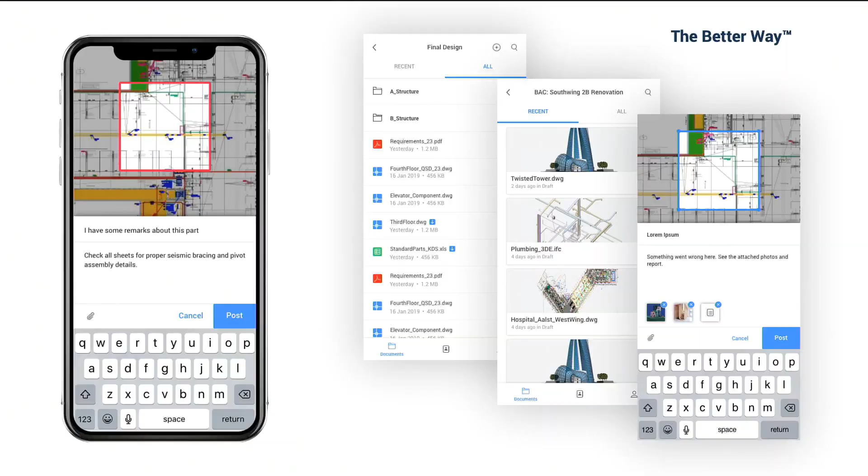I'd like to introduce you to the better way. It involves a mobile application where, as I said earlier, you can go on site, do what you have to do, have all the documents with you. You can run around, make sure everything is as designed, as it says in the spec, and if it's not, you can immediately flag it and alert the people who need to be alerted to fix the issues.

A better way involves close integration with the design software you're using, along with the collaboration software you're using, so you can work in your trusted BricsCAD environment and immediately collaborate with your colleagues. And of course, a better way involves a fully featured cloud application where you can collaborate with whoever you need to, to make sure the design or construction process finishes as successfully as possible, so the customers are happy.

Now to do this, we have on the one hand our enterprise offering, which you might have already heard of. We're also introducing a new flavor of Bricsys 24/7, aimed toward design teams. This new flavor contains all the features necessary for collaboration, and it looks a bit sleeker too, I'll admit—shout out to our design and front-end teams. They've been working very hard on this for the last year, and they'll continue to work hard on it for the coming months to make sure all the cool stuff in the new version will be included in our enterprise offering as well.